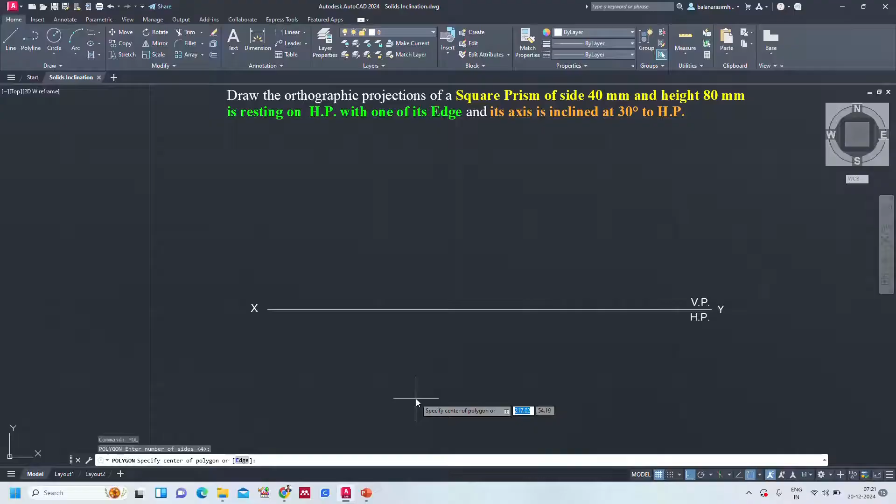Now let us construct the same. First we will construct the true shape in the horizontal plane as a top view. Polygon, number of sides 4, edge method, side is 40. Okay, now we finish this one. So when you see this one from the top, the upper base is clearly visible, the lower base is invisible. That's why I give the notations A, B, C on the outer side, which are visible notations. The invisible one, the lower base, I gave inside the base.

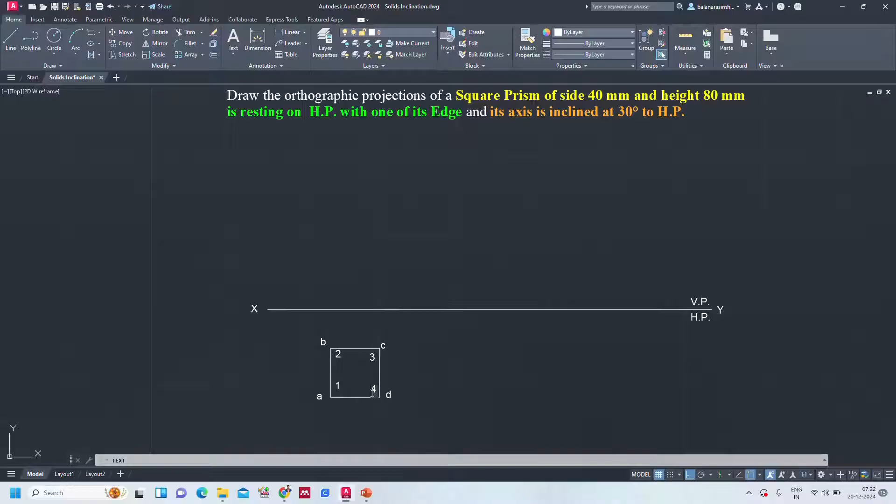Text. Specify start point. Okay, A, B, C, D. So this is all about the upper base notations, whereas the invisible one is the lower base: 1, 2, 3, 4. Perfect. We completed the top view of stage 1. Now it's time to draw the front view.

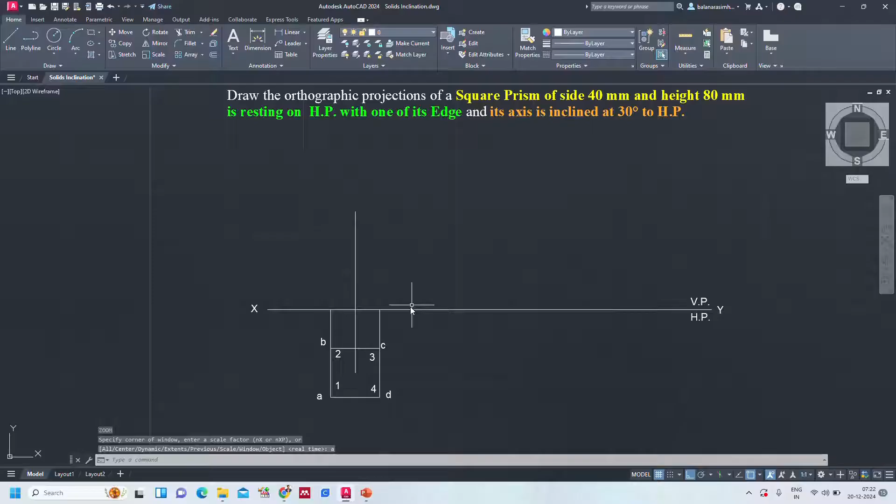So now I am going with the axis. The axis of the prism is 80 mm. Perfect. Now you can see that this is the 80 mm. When you see from the front in this direction, you can see that edge A1 is clearly visible, edge D4 is clearly visible, edge AD is clearly visible, edge 1,4 is clearly visible. So this face is clearly visible; the remaining three rectangular faces are not visible to our eyesight when we see from this side.

Now coming to edges B2 and C3, they are invisible, but as you know these hidden lines are overlapping with the visible lines. When hidden lines overlap with visible lines, we give priority to the visible lines. So B2 is a hidden line which is overlapping with the A1 visible line. That's why I am taking the visible line as the priority. The same applies here also.

Coming to the center, the axis of the solid is not at all overlapping with a hidden line or visible line. So that's why I took the axis as the same. Nothing overlaps it. We can represent the axis very clearly. That's why, take the axis. Yeah, 80.

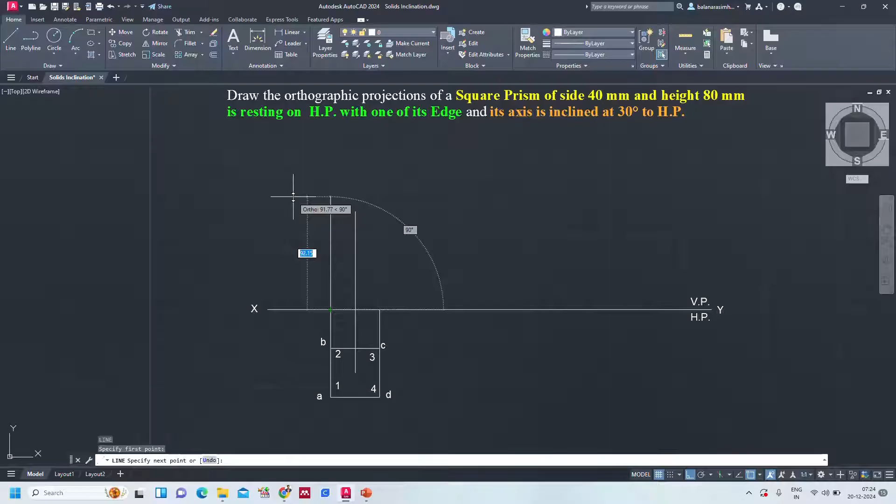Now this is all about the upper base. Now the lower base. Let's give the notations: A dash of B dash, D dash of C dash, and coming to here, 1 dash of 2 dash, 4 dash of 3 dash. Perfect.

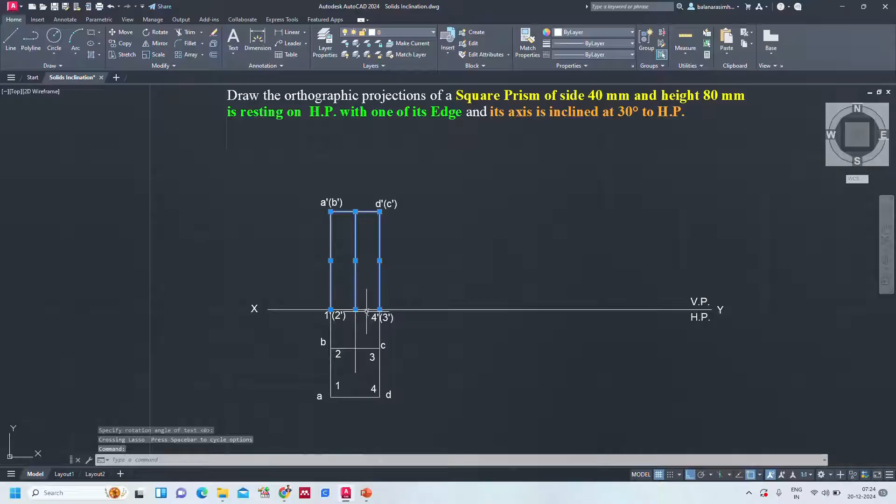Okay, let's give the line weight and color. So let's go with color. Line weight, I am applying 0.35. But this one is the axis, so I will go for the center 2 line with lesser line weight. Okay, perfect. So with this you can see that stage 1 got completed. The square prism is resting on horizontal plane with its base. We'll give the dimensions later.

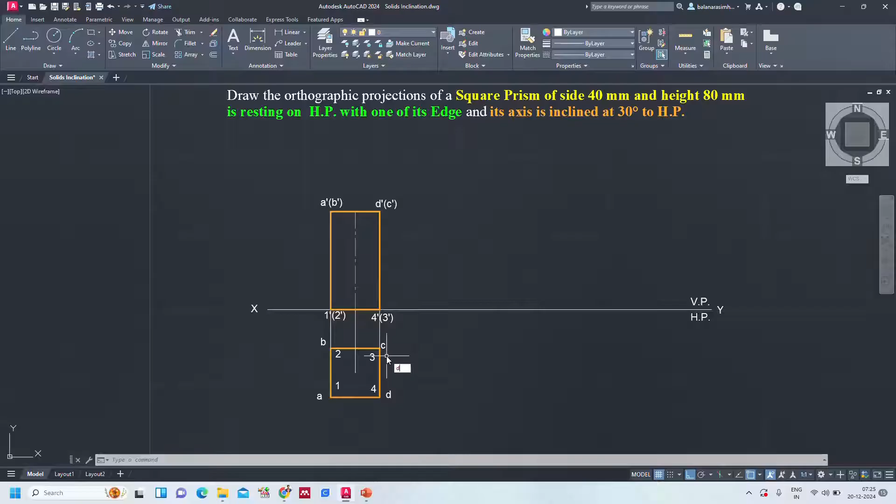It's time to go for the second stage, that is when the square prism is resting on horizontal plane with one of its edges. In this tutorial I am going to consider the resting edge of the lower base as 3, 4. So this prism is going to rest on 3, 4 and its axis makes an inclination of 30 degrees to HP. When you observe, when it is making an angle of 30 degrees, there is no change in the front view dimensions except a tilt. Just this front view is making a 30 degree inclination.

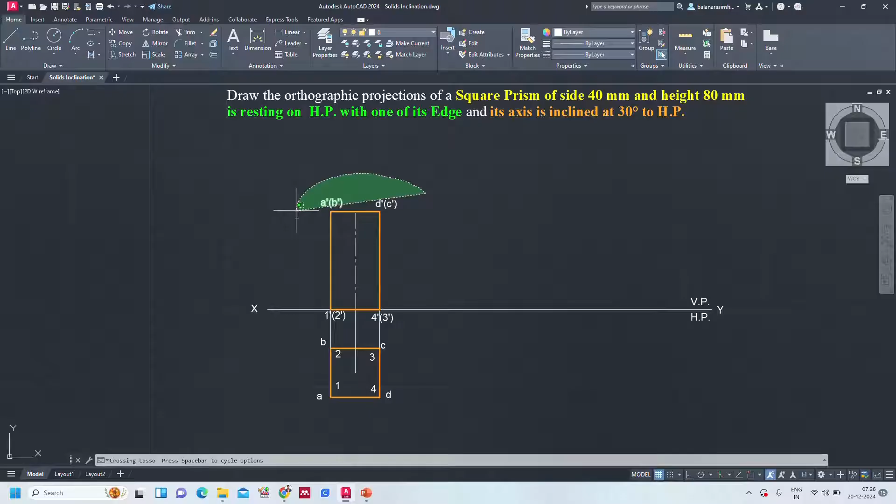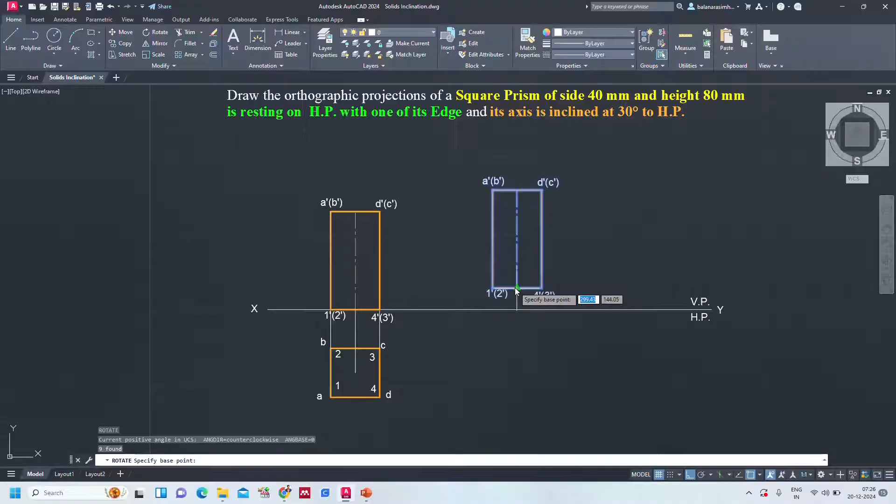So what I mean to say is, just copy this one, because there is no change in the dimensions, only the orientation changes. Ctrl C, Ctrl V. Now the angle between the axis and the reference plane is 90 degrees, but I want 30 degrees. So what I am going to do is rotate. When I want 30, I need to give 60, minus 60.

Perfect. See, exactly we made it, and it lies on HP only, resting on edge 4 3. Correct. Now the final front view is finished. It's time to draw the final top view. First let us draw the vertical projectors. Horizontal projectors, trim the unnecessary portion. Perfect. Let's draw this one also, the center line.

Now we'll give the notations. M text, A1, subscript. Now let's take this one, copy. I'll go with multiple, switch off the ortho, base point. I can give here, here, here, here.

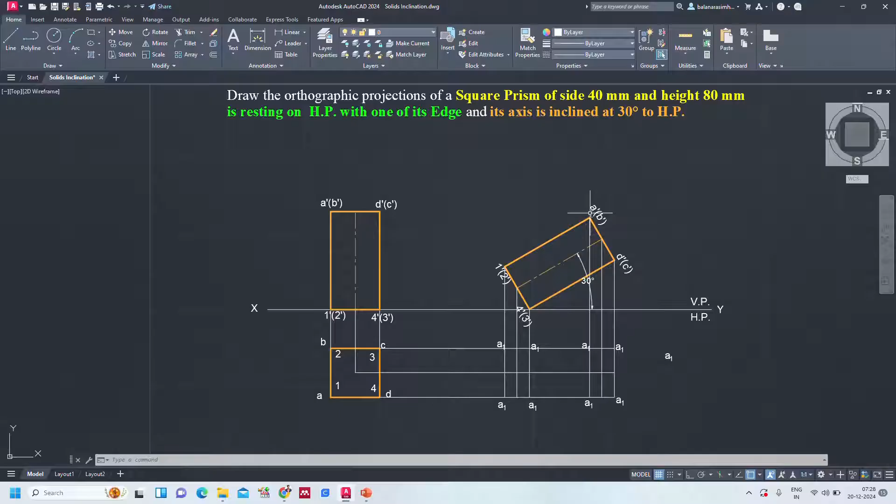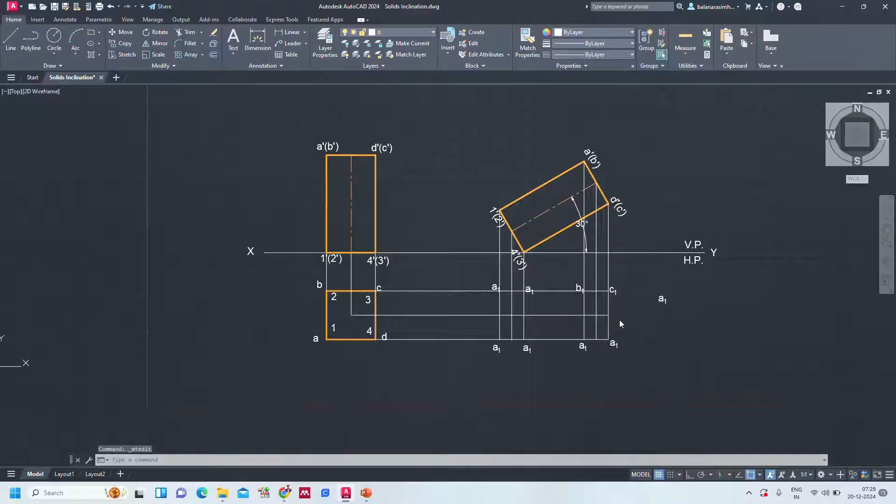Now this one corresponds to the upper base. So first let us give. This projector belongs to AB and this projector belongs to AD. The common point is A1. This projector belongs to AB and this one belongs to BC. The common point is B. Similarly, you can modify for the remaining. And this one corresponds to the lower base, so that's why this is 1.

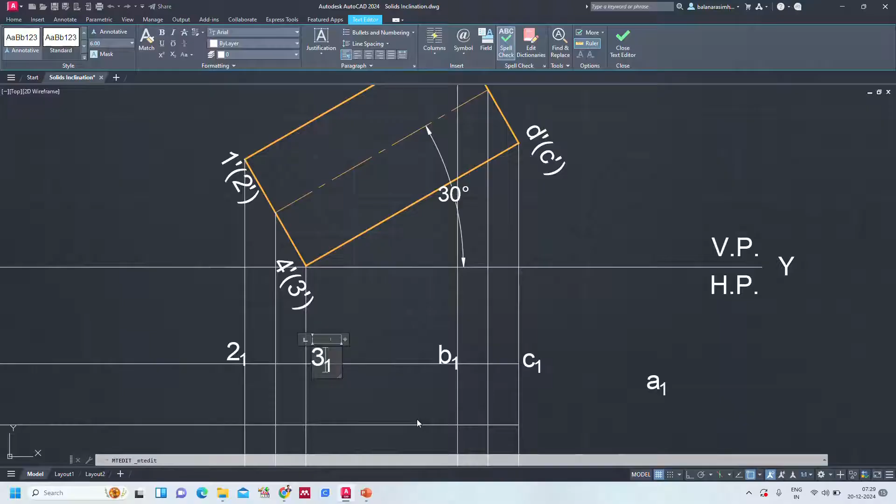Perfect. As you already know, whenever this prism is making an angle of 30 degrees, when you see from the top side, you can see the complete top base. We have a clear picture of the top base, so there is no hidden part in it. So I am taking the polyline: A to B, B to C, C to D, D to A. So the upper base is clearly visible to your eyesight.

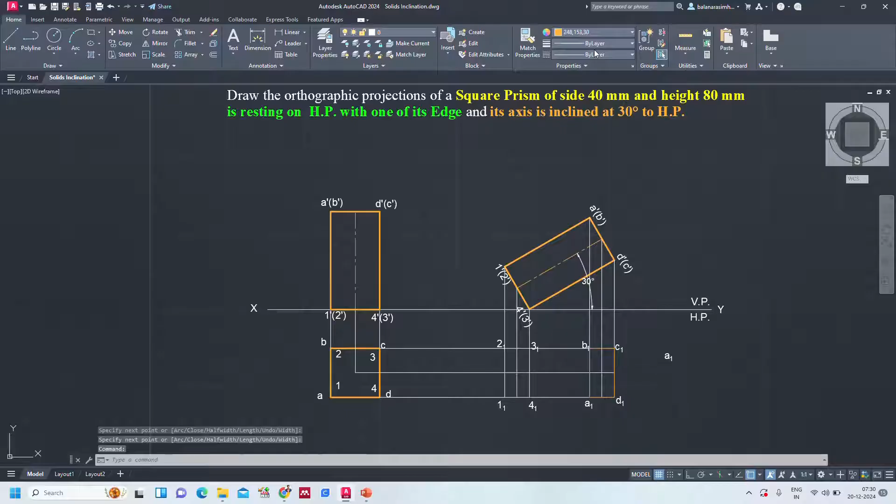Now coming to the lower base, when you see from the top, only the edge 1 2 is visible to our eyesight. 2 3, 3 4, 4 1 are invisible when you view from the top. The remaining base we cannot see. So I give a visible line only for 1 2, and the remaining edges are dashed lines or hidden lines. First let me take a normal line instead of polyline. 1 2, 2 3, 3 4, 4 1.

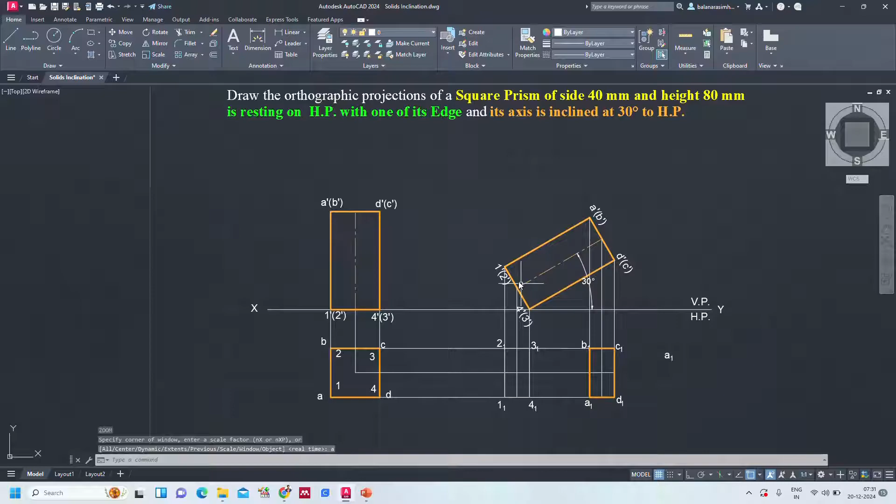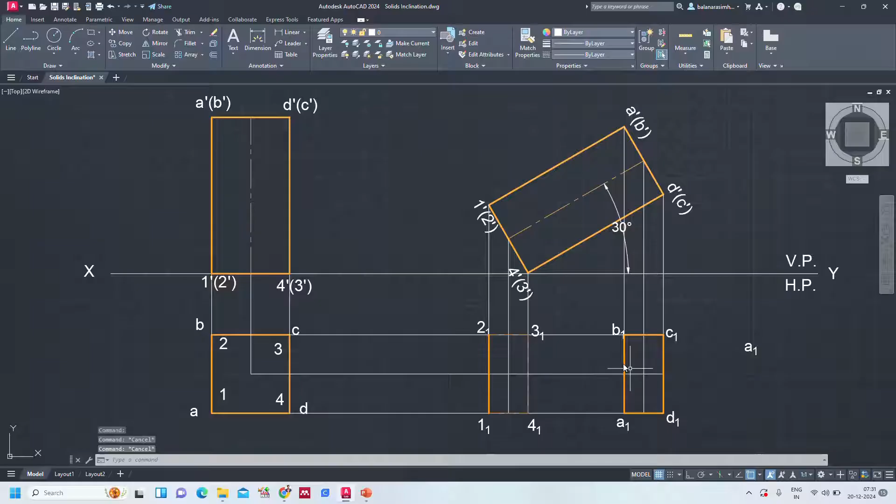If you are unable to imagine, you can see here this edge 1 2, which is above the axis and also far away from the reference line. When you see from the top, this 1 2 is clearly visible. Coming to 2 3, 3 4, 4 1, they are invisible. I'll go with 0.25 and it's a dashed line. It's overlapping, so for the sake of clarity I'm just moving it here.

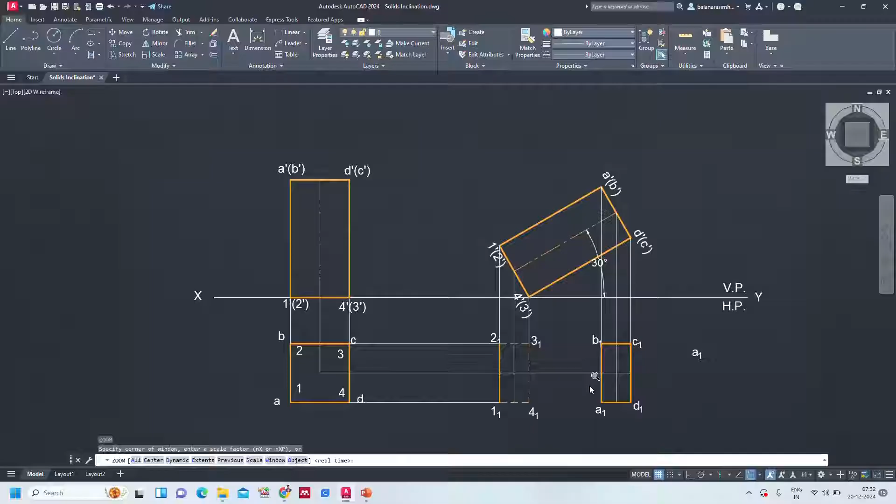See guys, perfect. When you see from the top, the upper base is clearly visible, and in the lower base only the edge 1 2 is visible. 2 3, 3 4, 4 1 are invisible. Now it's time to draw the rectangular face edges. From the top, A1 is clearly visible, B2 is clearly visible. D4 and C3 are invisible.

Now take a line. First I will connect A1. If you observe carefully, from 1 to 4 a hidden line is already there. So in this portion there is overlapping between the visible line and hidden line, but according to the priority we go with the visible line only. So no need of hidden line. Perfect. 1A, 2B. This is also a visible line. Here we already have a hidden line, but the visible line comes front because of the overlapping.

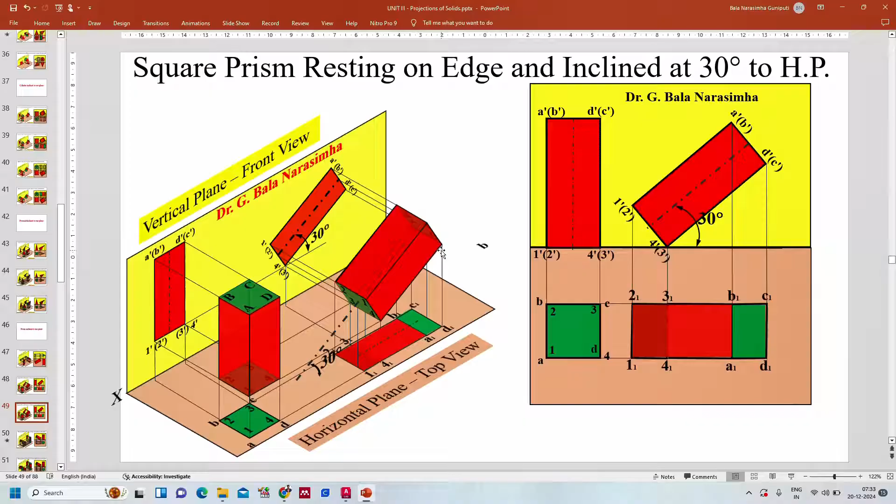Now as I said, 3C and D4 are invisible when you see from the top. But here they are already overlapped with these visible lines. From 2 to B it is visible and BC is visible. So there is an overlapping between the visible and hidden lines, so no need to draw the hidden lines for 3C and 4D.

Now it's time to draw the axis of the prism. From here to here, the axis. Let us go for 0.25 only. Set it.

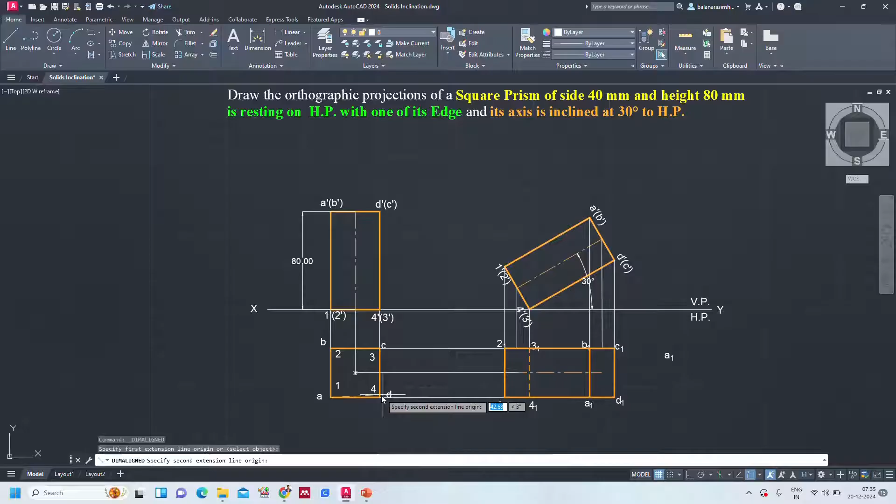So this is all about the orthographic projections of a square prism when it is resting on an edge and the axis is inclined at 30 degrees to HP. DAL will give the dimensions. That's it, guys.